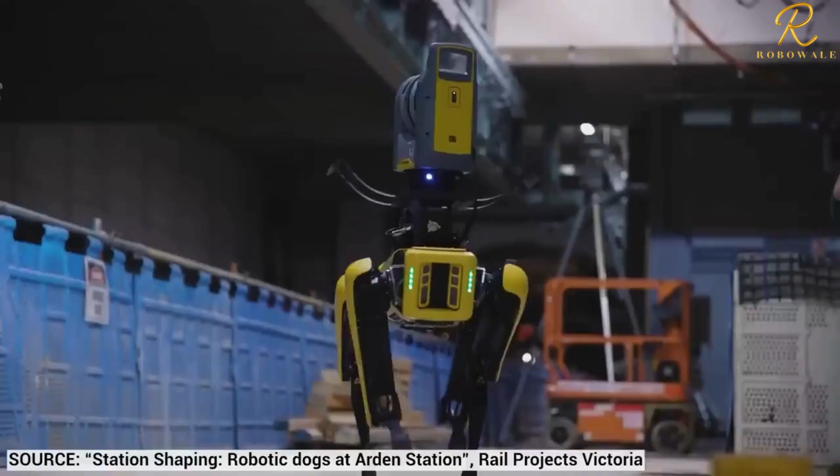Back in 2019, the American startup Boston Dynamics wowed the world with the first commercially available robot dog, Spot. Since then, the potential applications and commercial interest for such quadrupeds have only expanded. The key benefit of walking robots is that they can be directly incorporated into environments designed for humans or natural terrain, and can thus assist in tasks directly.

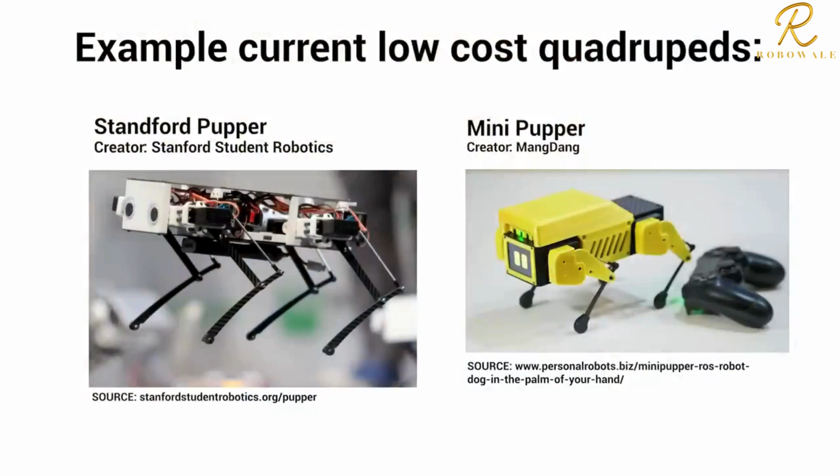In researching this area, we found that current high-quality robot quadrupeds that are expandable and robust for research use are very expensive. Budget models, on the other hand, sacrifice either form or function to meet budget requirements. Currently, if student researchers at Monash Robotics decide to work with a robot quadruped, they have few options. Purchasing a suitable robot would either cost a few $1,000s, making it prohibitively expensive for student projects, or the robot will be too small for use or lacking an aesthetic form.

It would also make repair costs far too high to be practical, as shipping parts back to a supplier every time you snap a leg off is just not feasible. Our project, the design and construction of a low-cost robot quadruped, is a response to this. Nathan and I set out to create a quadruped that was affordable, robust, capable of being expanded or modified for conducting a variety of research, and aesthetically pleasing.

Our aim was to design and build an elegant robot solution that could perform fluid motion, all for the cost of only $1,500. After months of design, prototyping, testing and building, we are pleased today to be able to introduce our robot, the Dingo.

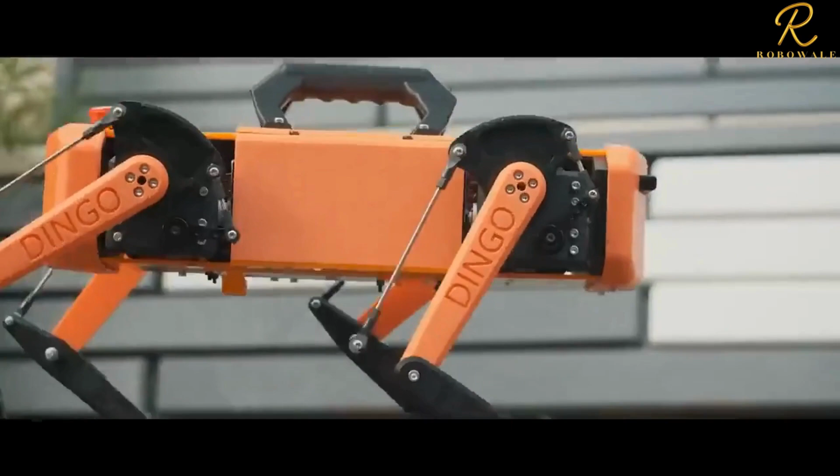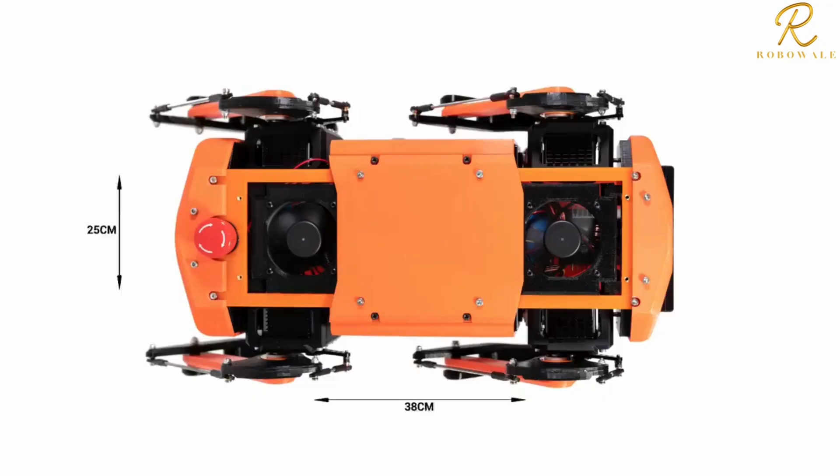The Dingo weighs in at just over 3 kilograms, making it easy to transport and move around. It has a length and width of 38 by 25 centimeters and stands 25 centimeters tall in its resting position. It is controlled by a PlayStation controller or via the keyboard of a computer which is connected remotely. The user is able to have direct control over the pitch, roll and yaw of the robot. It can also change its height either at a standstill or while moving, and can walk in any direction.

With a top speed of 30 centimeters per second, the Dingo can easily walk through a room or area, allowing for efficient research and data collection. It has a payload capacity of up to 500 grams, making it suitable for carrying additional sensors and actuators for research purposes. It also provides full state feedback in both the joint and task space, aiding the user in the development of advanced control and decision-making algorithms.

The key size and weight constraints of the Dingo were primarily dictated by the motors used, which, as the most expensive part of the robot, were limited by the available budget. Each leg of the Dingo relies on 3 servo motors, each rated to 35 kg/cm of torque, for a total of 12 motors.

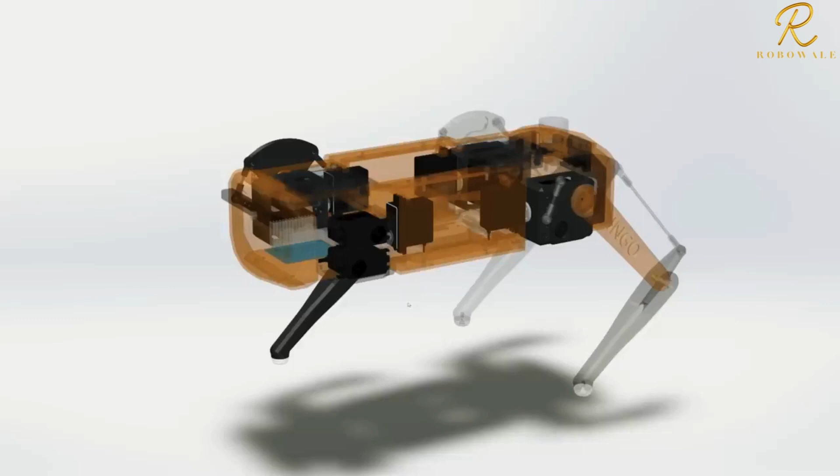One of the benefits of our design over some others is the unique placement of the leg motors. We have designed our own mechanical linkage that allows 2 motors to be placed on top of one another in a hub, keeping the heavy motors tucked in and reducing the inertia of the leg to aid in smooth movement. While one motor drives the upper leg directly, the other motor operates the lower leg via a linkage, and both motors share the same functional axis of rotation, greatly simplifying the kinematics and reducing the chance of limb collision.

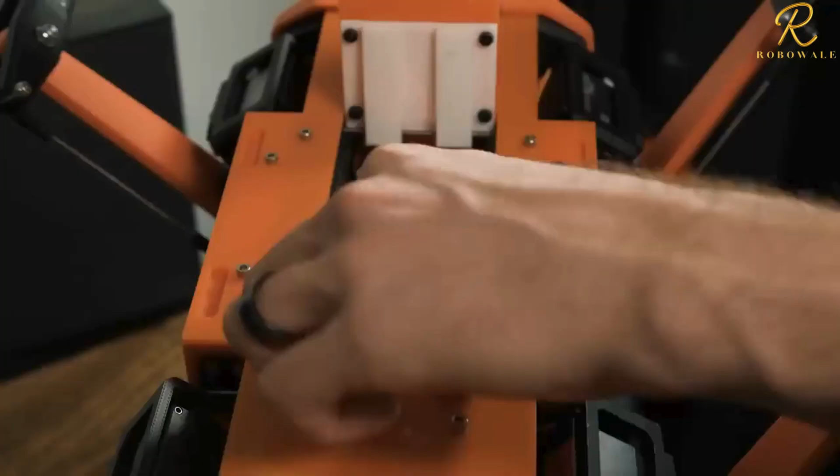Power is delivered to parts of the robot via a custom PCB. On top of distributing power to existing components and measuring the voltage of the attached battery, the board has many ports for powering additional 5-volt devices that the user may want to add. And we even have spots to add a 12-volt buck converter for 12-volt power if desired.

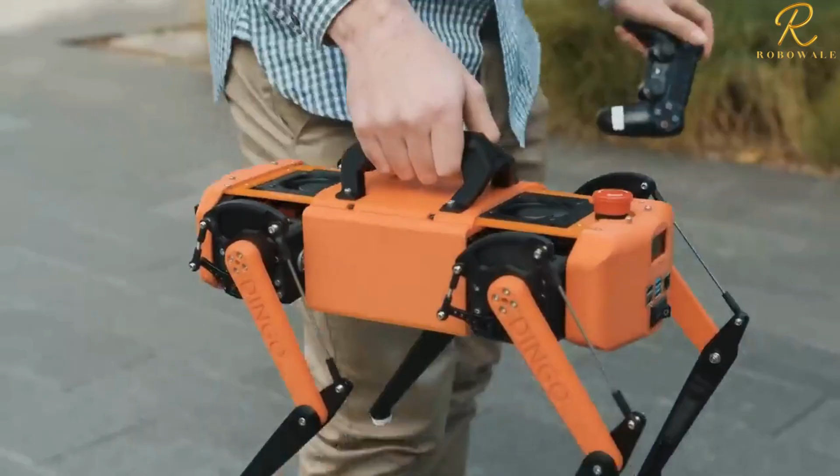As you can tell, modularity and expandability have been key points of our design throughout this process. The torso of the robot has a removable front and top plate, as well as 10 spare mounting holes placed on the top. One of our favourite uses for these holes is mounting a carry handle, which can be used with or without the top plate. In future, this could be used for a LiDAR or other laser scanner module for area mapping.

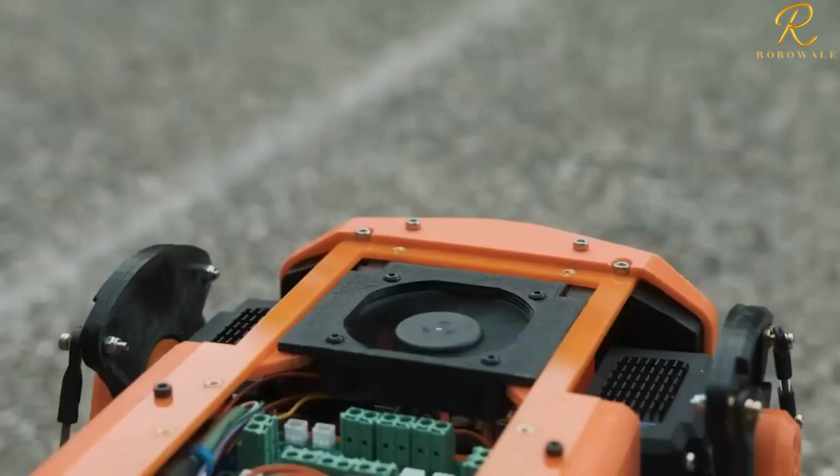To maximise the longevity and performance of our motors, the Dingo features 2 large fans on either end. Under use, these fans reduce the average temperature of the motors by 20 degrees Celsius, bringing the average temperature from 59 degrees down to just 39. When working on the robot, these fans can be flipped up at either end, and when down, they are each held firmly in place by pairs of neodymium magnets.

The back of the Dingo is designed to be maximally useful for the operator. Access to USB and Ethernet ports of the Raspberry Pi is easy, and there's also an LCD screen that can be programmed to show useful information, such as remaining battery life or IP address connection details. Finally, the top of the robot features an Australian-approved e-stop. Pressing this cuts all power to the motors while keeping power to the CPU, ensuring that a user is safe from finger jams or is able to stop the robot if anything goes wrong.

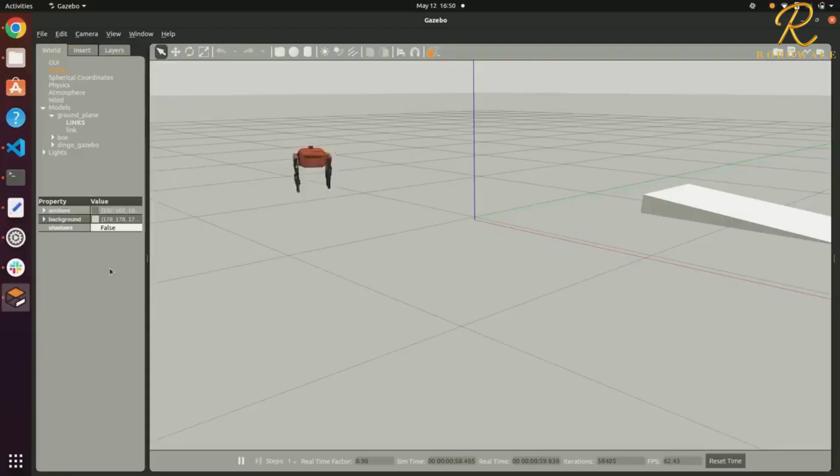In addition to the physical robot, we have also built a parallel simulation using the software Gazebo. This simulation contains an exact model of the Dingo and can be used to test various patterns of walking, as well as control algorithm changes. Importantly, it could also provide a testing ground for reinforcement learning to teach the robot to remain stable over rough terrain, while allowing direct transfer to the real platform.

The simulation has had some slight simplifications made, such as removing the complex leg linkage. However, all of the functions are the same. The simulation can be run at the same time as the physical robot, as the joint angles are published via a ROS topic, which brings us to our next point.

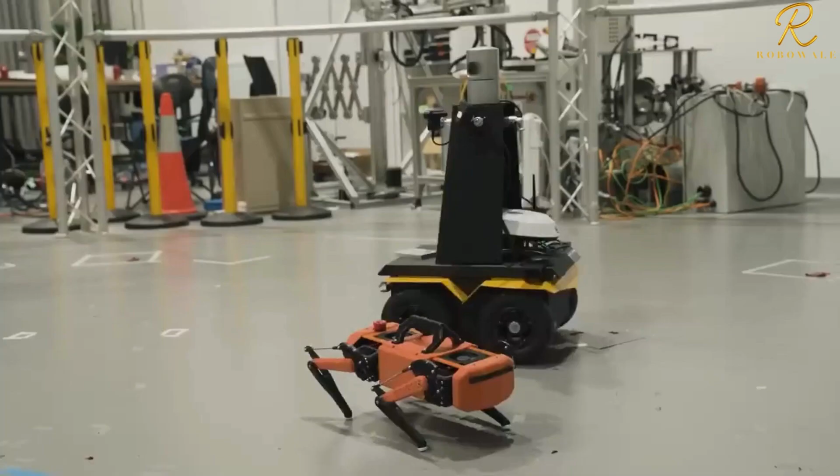The Dingo has been built within the framework of ROS Noetic, a version of the open source Robot Operating System. ROS is standard within the research and open source robotics community, and it was essential for all stakeholders that the robot we designed be built using this system to ensure ease of use, expandability, and incorporation into existing systems. By integrating our robot into ROS, researchers in the robotics laboratory will be able to easily deploy and integrate their code and existing packages with the Dingo.

We are proud to say that we have created a robot that can serve as a reliable and adaptable platform for future students and researchers. From start to finish, every decision was made with the intention of facilitating our next users. Our screwless battery access flap, removable foot pads, and our utilisation of brass-threaded inserts in over 80 places to add longevity are prime examples of this.

While we have many suggestions for future work, we believe we have accomplished something significant. By making the robot available through the release of code and our CAD model, we hope to make a valuable contribution to the open source robotics community.